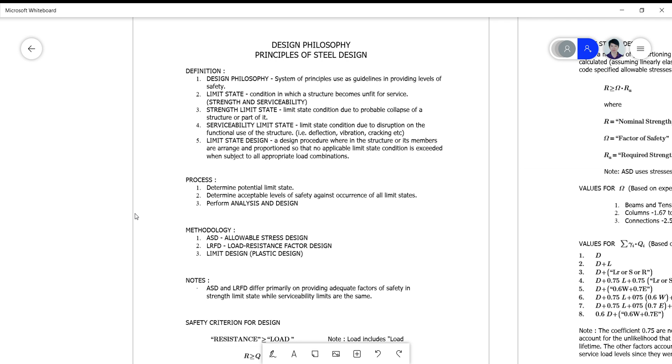Hey guys, today we are going to talk about the principles of steel design and its design philosophies. These are actually applicable to other procedures, including reinforced concrete design. So let's try to define first some terms here in order for us to understand the meaning of the different philosophies involved in the steel design procedure.

So first, design philosophy or philosophy. Philosophies are a system of principles used as guidelines in providing levels of safety. So when we talk of philosophy in design, we simply refer to the idea, the principles, the fundamental guidelines for us to be able to provide a safe and sound structural design, particularly in steel.

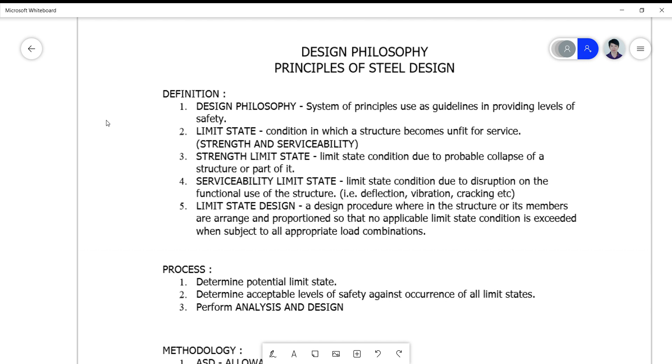So for the limit state term, we refer to this condition in which a structure becomes unfit for service. So there are two types of limit state condition. The first one is the strength, and the second one is serviceability. So it's not complete to consider only the strength condition when we talk of safety in design, as far as the limit state is concerned, but also the serviceability aspect of it.

So for the strength limit state, we define this condition, which is actually accounted for and manifested by the probable collapse of a structure or any part of it. And for serviceability limit state, this is the condition in which there is disruption on the functionality or use of the structure. So in summary, a limit state design methodology is simply a procedure wherein a structure or its members are arranged and proportioned so that no applicable limit state condition is exceeded when subjected to all appropriate load combinations.

So to wrap this up, these terms here are very important as we go along the study of the principles of steel design, and they are defined in a way that we only need to establish the important keywords for us to understand the meaning of it. Okay, so again, philosophy simply are the system of principles that are used. The limit state is simply a condition in which your structure becomes unfit. And we have two types of limit state condition.

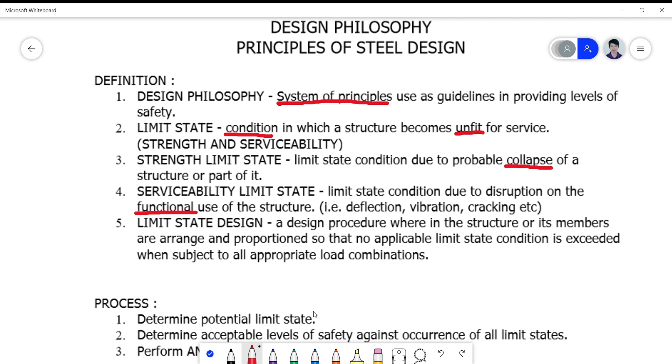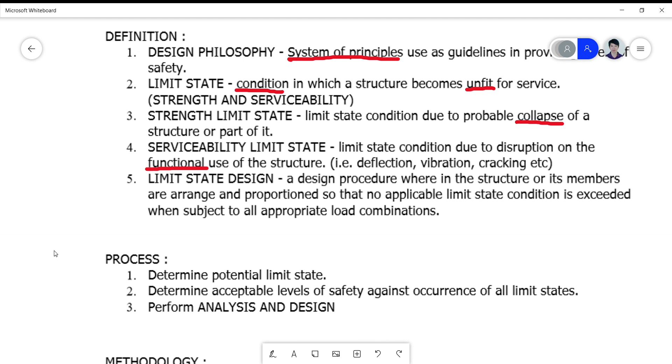So for the process involved in undergoing a limit state design procedure, we have basically three steps. The first one is to determine what potential limit state or limit states are. So this can be one, two, or more than two limit states. The first thing to do is to determine potentially what those limit states are. The engineer has the obligation and responsibility of looking into those potential limit states in order of priority.

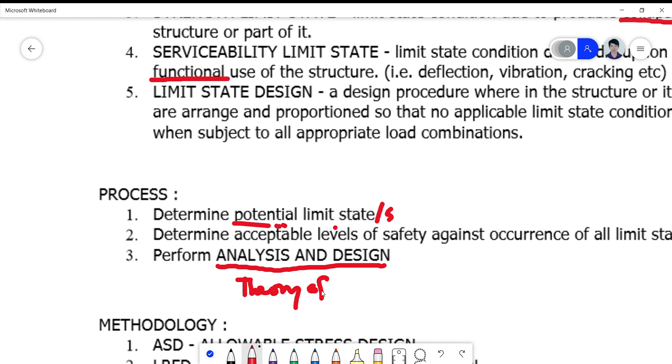And for number two, we determine the acceptable levels of safety. So here again, the engineer will provide a margin of safety, a level of safety that would assure that your structure will perform soundly against possible loads and occurrences of all the limit states. And of course, after these two steps, we need to perform the actual analysis and design based on the principles we have learned on the theory of structures or structural mechanics.

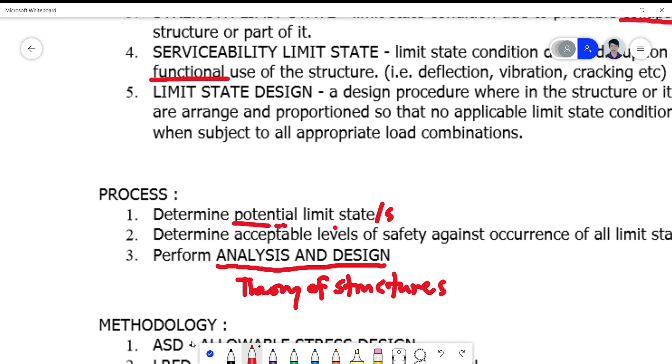For the specific methodology that we use in this limit state design procedure, we have, in general, three methodologies. The first one is the ASD, LRFD, and the limit state or the limit design or the plastic design methodology. So ASD and LRFD are acronyms of allowable stress design and load resistance factor design, respectively. So limit design involves the plastic analysis or the inelastic analysis beyond the elastic range, and there are a lot of considerations given to this. So these are advanced procedures in design, and these are actually, shall I say, elementary procedures in design.

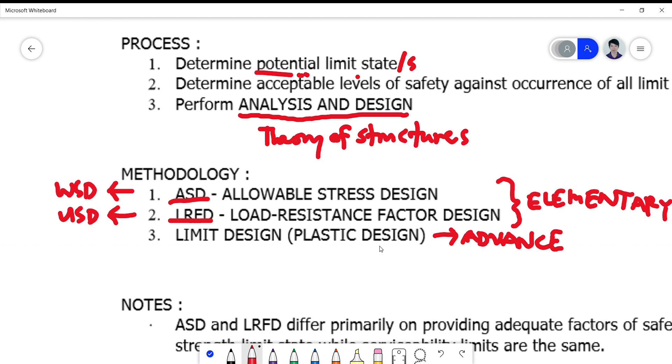Okay, so the ASD and LRFD are better known as the WSD in concrete and USD in concrete. This one is based on the elastic theory, and this one is based on the inelastic theory. The limit state design is beyond the inelastic range, which is called the plastic range as far as steel design is concerned. So take note that the ASD and LRFD differ primarily only on the provisions of the factor of safety given to it, and as far as the strength limit state and the serviceability limit state, they are just the same.

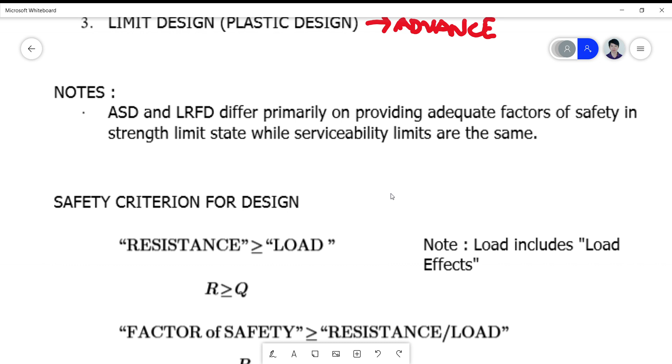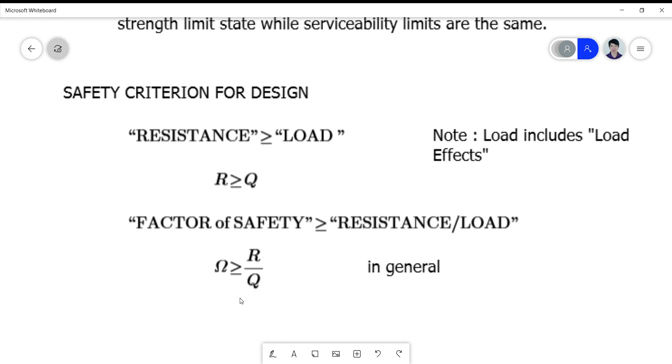And of course, for a basic safety criterion, we can define that always for a safe design, the resistance must always be greater or equal to the load, that is R greater or equal to Q, wherein the loads here refer to not only the actual load but also the load effects, including that of shrinkage, temperature, creep, etc. So the factor of safety is always measured by simply dividing the resistance over the load, and that is indicated by the equation omega greater or equal to R over Q in general.

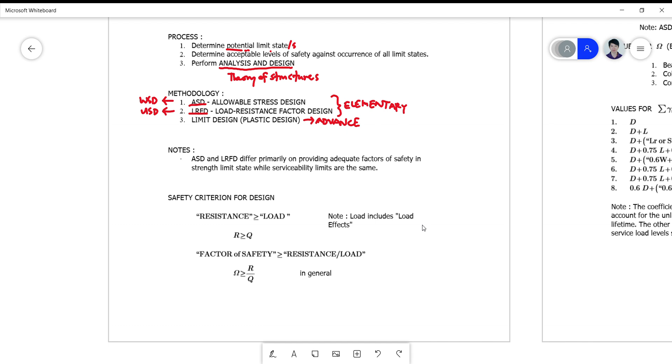So basically the principle of design specifically in steel is actually made and considered on this premise, and the specifics of such methodology will be discussed in our next video.